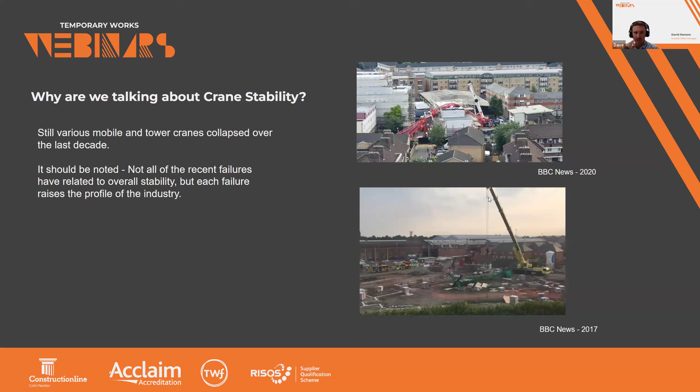Going over the basics, there's a few types of cranes that you should be considering, but the majority are, we're going to focus really on mobile cranes here. We've done various presentations on tower cranes before, but mobile cranes are probably more of the priority.

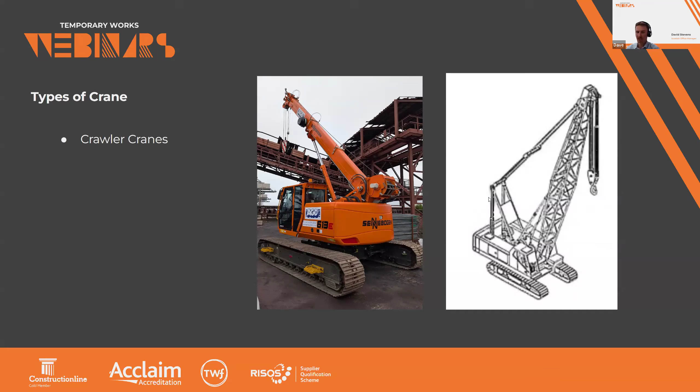Crawler cranes operate on tracks, so the pressure in general goes down through the tracks and onto the subgrade. Mobile cranes operate on outriggers, so when the crane is operating, the wheels are not on the ground, and the load is going down through the outriggers onto the subgrade.

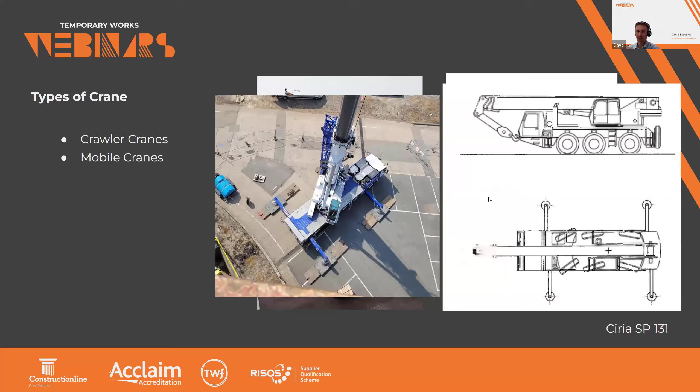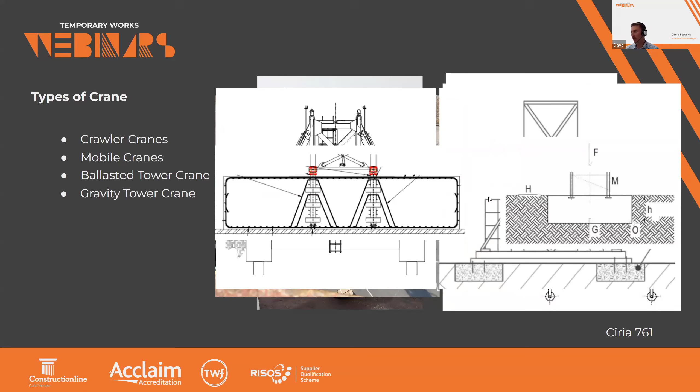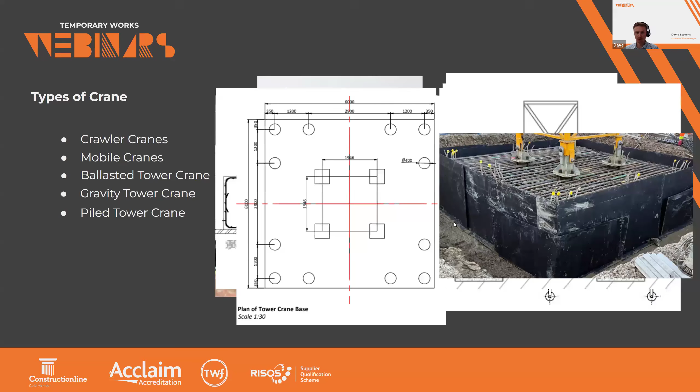There are also three kinds of tower cranes: ballasted tower cranes where there's just compression going through the foundations, gravity tower cranes where you've got casting anchors but the stability is maintained by the self weight of the foundation itself, and piled tower cranes where the moments generated by the crane are transferred via the piles, both in compression and tension, and that's what provides stability to the crane.

A brief overview of roles. The appointed person is responsible for the planning, coordinating and overseeing the lifting operations. They develop the lift plan and select the correct lifting equipment, among other things. The CIRIA Special Publication 131, which we'll reference through this presentation, gives you your roles and responsibilities. I've taken an excerpt of it there just to indicate what's required.

Where we come in as temporary works designers is we are provided with the loads from that crane when it's operating, and we carry out checks on the subgrade or the structures that are loaded by the crane. Where required, especially during demolition projects, we might work out the lift weights for structures. If it's not a specified lift weight, we'll carry out assessments on the lift weight and where the centre of gravity is.

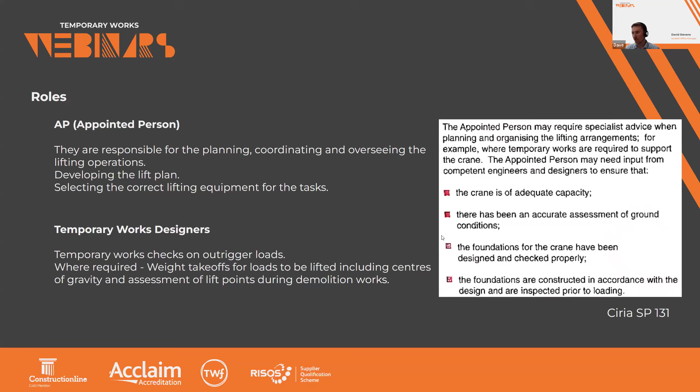And if the lift points are not rated lift points, then a structural assessment on that lift point is needed. So, main constraints: what causes cranes to have issues, or what are your worries when planning your crane position? I'm going to talk about these in more detail.

Things to consider are adjacent items that would require third-party authorization. The main one is Network Rail, who have specific requirements, which I'm going to go through. Adjacent structures and vegetation can cause clashes both with the boom, and one that's often forgotten is the stays that come off the back while lifting. I've never had to deal with it, but there are restrictions when putting cranes up near airports.

That's something to be aware of in certain situations. Overhead cables - I've got information on how they can interface with, or should not interface with, cranes. Services and buried underground structures matter too - this is what, when you've got your outrigger loads normally on road surfaces, the pressures or allowable pressures onto surfaces are.

There's the obvious risk of soft or poor ground, which most engineers are capable of assessing - that's the more fundamental thing you'd need to deal with. One that's often forgotten is access and egress. Cranes, when traveling around site especially, have very large wheel loads, and the swept paths are quite complicated, so understanding how you're going to get your crane into site and how it's going to leave is important.

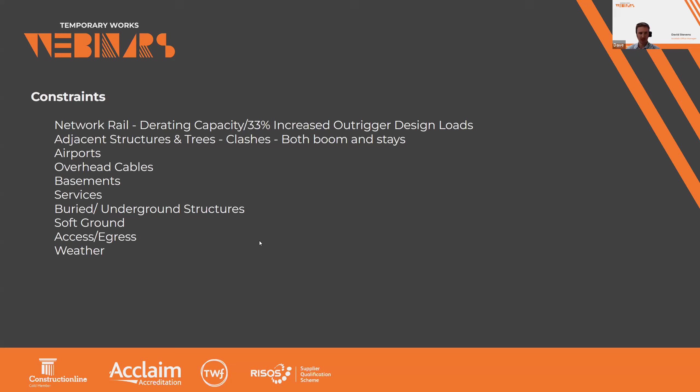And though not really controllable by the engineer, weather also plays a part. It's nice not to plan all of your crane operations for the winter, but it's not really in the temporary works engineer's control to deal with that.

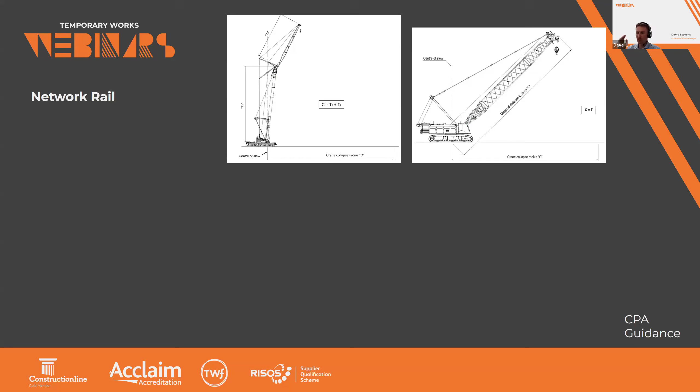So Network Rail is the first of those. I've taken some screenshots from the CPA guidance here that indicate what your collapse radius would be for certain cranes. In general, you're looking for the length of the boom above ground, and that equals your collapse radius. Once you've got that, you then need to consider the length of the load that you're lifting, because if it's a long beam and the crane collapsed, if that was orientated the wrong way, it would get closer to the Network Rail line.

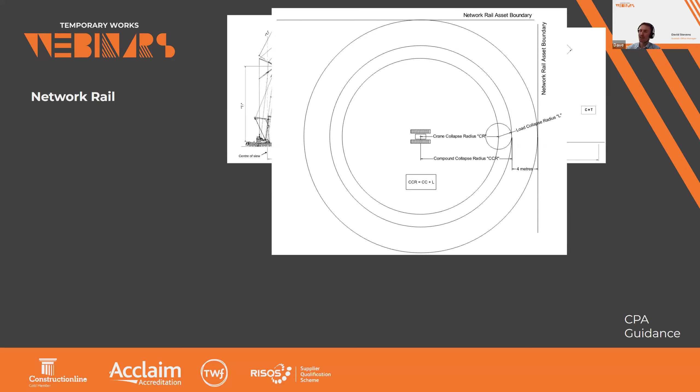And then they ensure that there is another 4-meter clearance zone beyond the end of your item that you're lifting collapsing. If you're outside of that, perfect, that's the best situation to be, that your collapse radius is not near network rail. If that would overlap the network rail boundary, then there are requirements.

So when it comes to mobile cranes, what you'll be doing is making sure that the crane is operating within 75% of its operating capacity. To go beyond that, in general, you'll need to get a closure of the line. Also, on top of that reduction, you would need to factor up your outrigger loads. There's some double factoring happening here. You derate your crane, and then you factor up your outrigger load by 33%.

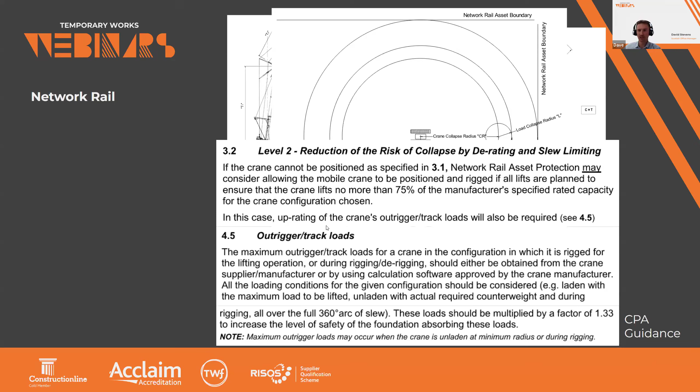So it'll provide quite a conservative foundation design for that crane, and the crane will be operating well within its capacity. Overhead cables. So the exclusion zone for overhead cables depends on the type of cables and kind of what you're operating.

Also, it should be noted that cables aren't static, especially on tall pylons. They sway in the wind, and they might sag more than they are in existing conditions if they are running at very high current when they heat up, or when they're loaded with ice, they can sag quite a lot more. I've got a screenshot there from the CPA guidance for lifting operations with excavators, which gives you some minimum clearance zones.

Obviously, the best thing is to be further away, so I would encourage trying to avoid operating adjacent to power lines, but where it cannot be avoided, that's some guidance on what to be looking out for. But the best situation is always not to be very close to them.

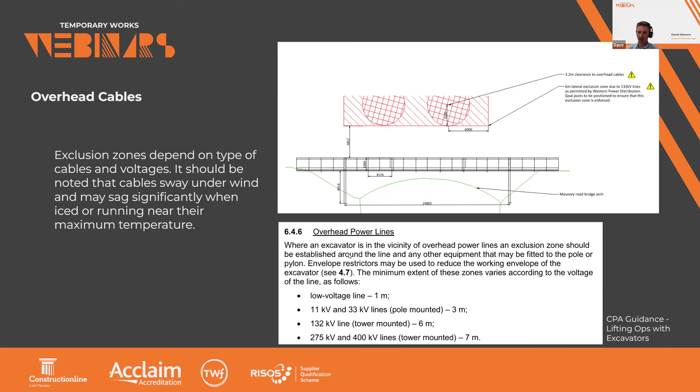So basement retaining walls. Again, I'm kind of referring a bit to the CIRIA guidance here. They give a danger area, in inverted commas, of when you would require further engineering considerations. They look to retaining walls or adjacent to basements of 4 times the breadth of the outrigger pad, or 1.5 times the height of the retaining wall.

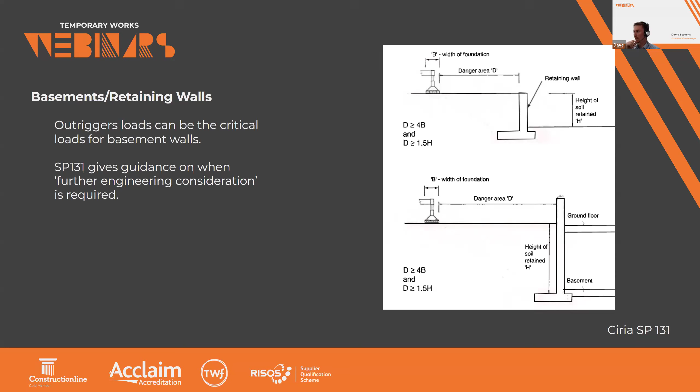So it gives some guidance on what is a safe place to put your crane where you don't need to provide further engineering consideration. To be fair, if you're right on that limit, I'd probably have a think about it anyway. But if you're within that limit, I would be consulting an engineer to understand what the implications are on the structure from positioning your crane there.

Slopes are pretty similar to basements. The distances are slightly different. So you're looking at 4 times the breadth of the outrigger, or 2 times the height of the slope away from the base of the slope, would be your safe distance that they consider.

But with slopes, more than with basements, if you're on really poor ground, it's worth getting an assessment, a formal assessment on the effect of that prior to putting your crane there, because if that does fail, it will be quite a sudden failure and it may not be recoverable for the crane. It's not just going to sink a little bit.

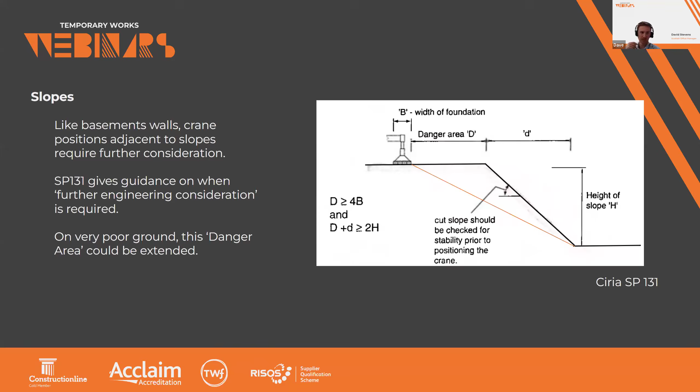Services. So services are often one of the biggest unknowns with crane positions. If you're operating in most British cities, there will be numerous services. They in general won't be mapped particularly well, and there will be significant unknowns on the depths of services or the construction quality. On new sites, there are design standards that should have been obeyed.

Things like BS 9295 would give you an idea of what the allowable pressures onto those services are. In most situations, what you're relying on is a live load comparison to historic loadings, which doesn't completely eliminate the risk. It just, if lorries are constantly going up and down that road, gives you an idea of what that service would be subject to at the moment, and we can compare that to the pressure from the crane. Saying that, very brittle services such as cast iron water pipes, even at very small strains, can crack.

And can break and can cause water leaks. So there is a residual risk when putting cranes above cast iron water mains that they may fail because of the nature of the cast iron pipes.

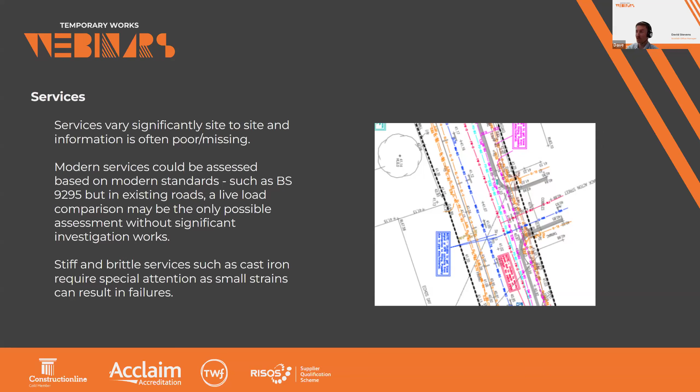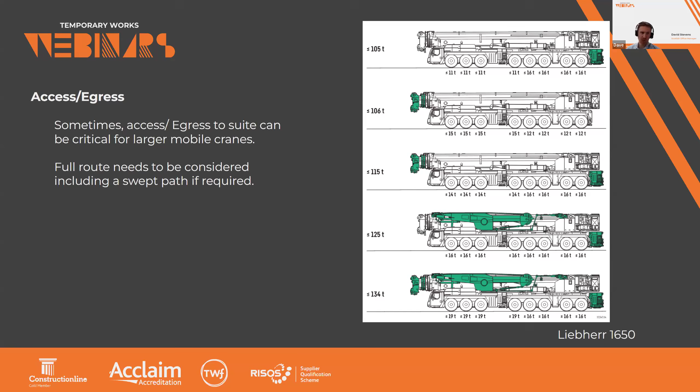So you need to really think about your swept path of where your crane is going and what that will interface with as it travels. So onto the geotechnical assessment.

The first thing to do is to understand what the loads are onto your subgrade, and this is normally going to be through a few layers. If you've got a mobile crane, it's not just in the direction of the lift that you've got your critical outrigger load. When it is lifting, you get the higher outrigger loads on the lifting side, but as soon as that weight has been dropped off, you've got the counterweight directly over the rear outriggers. They become the critical, highly loaded case. And quite often when a crane is setting up and slewing 360 with the counterweight over the outriggers, that can be the worst case, and it might not just be during lifting.

And it's always good practice, we'd like to recommend, if possible, that the crane does slew 360 with the jib in, just to bed in all the outriggers and ensure there is no movement when you're not lifting.

With crawler cranes, you get a triangular load distribution under the tracks. So unlike with a mobile crane, when you've dropped your load off or before you've picked it up and the counterweight's over the rear, you get a triangular load towards the rear of the track. So both cases need to be considered. These loads we will quite often equate to an equivalent rectangular pressure for calculations, and that's an accepted way to do it. It's very similar to pile rigs.

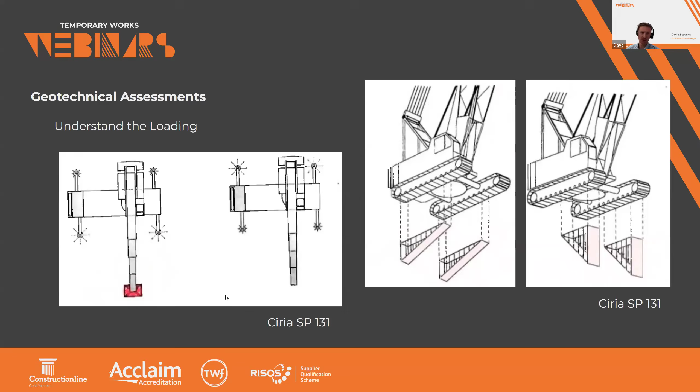So, types of outrigger mats. Assuming that your track or your outrigger is overstressing the ground without any outrigger mats, which is often the case, you would be looking at how to spread that load. And there's a number of different options.

The first and one of the stiffer options is if you've got big steel mats, and a lot of cranes will come with some form of steel mats. They should be allowed for. They provide pretty good load spread, and they're obviously very stiff, so that helps a lot there in comparison to the ground.

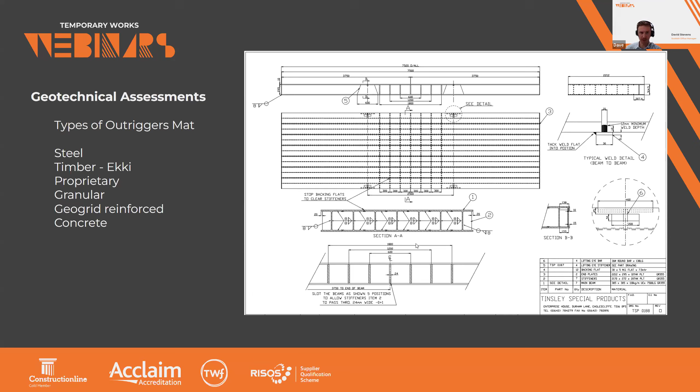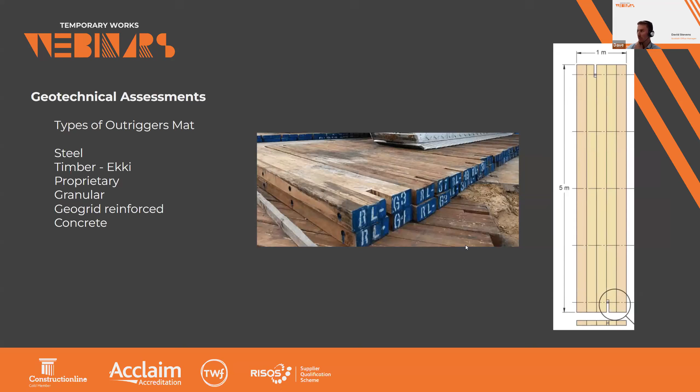Timber mats, so traditional timber Ekki mats, which will provide pretty good load spread, and that can be assessed with how that will distribute the load over the ground.

There's also plenty of different types of proprietary mats, both aluminium ones and different types of polymer mats as well. These are often more difficult to assess for a temporary works engineer because the data is not provided by the suppliers in some situations, or the data is incomplete. They may almost inadvertently give you a maximum load which the mats are incapable of spreading to that distance. So it's something to be aware of with proprietary mats, that even if they state that load, there's probably still a requirement to assess how flexible they are on soft ground.

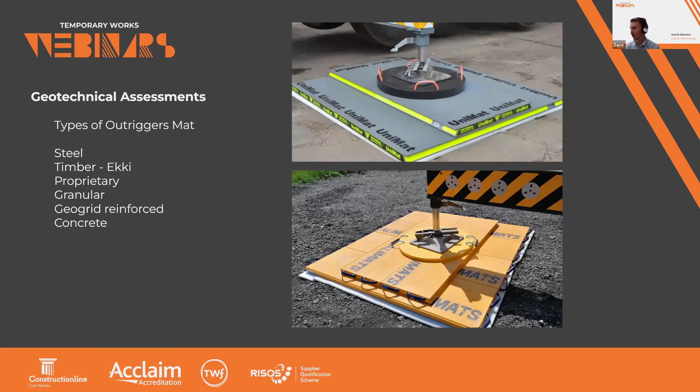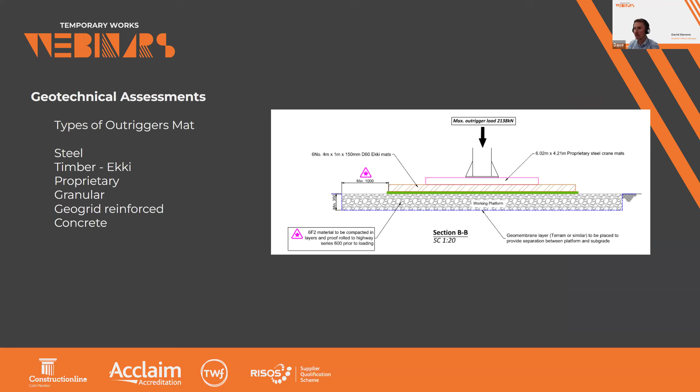When you're coming beneath those types of mats, then you've got your granular or your geogrid reinforced layer. What you're looking to put there is some well compacted fill, which will generally spread the load at about 30 degrees through to the subgrade beneath, and it also provides containment on granular and cohesive grounds.

Geogrid reinforced - the advantage of these is you can build up steeper batters if you are close to other site elements that require protection, and you'll get better load spread from a geogrid reinforced mat, maybe up to 45 or 50 degrees, depending on the type of geogrid and how tightly spaced they are. Also, if your crane is positioned on a concrete slab, that does provide load spread.

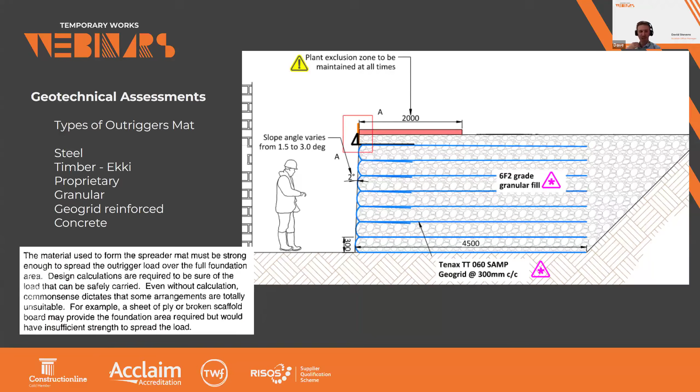I didn't bother to find a picture of a concrete slab because I understood that people would understand how that actually works. So this caught my eye going through the special publication, which I found quite amusing - it notes that a sheet of ply or a broken scaffold board doesn't provide a suitable foundation area. I think it's a good reminder that not everything is the same stiffness, and you really need to think about how stiff the mat is that you're putting down. I like the gist of the quote.

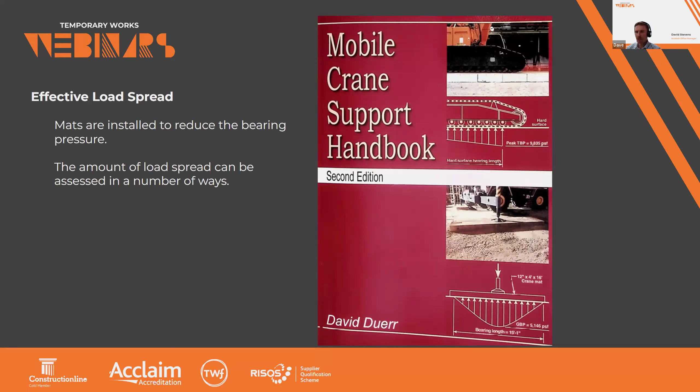So when it comes to assessing how far that load would spread, what we would generally use is the David Duerr method or something similar that looks at the stiffness of the crane mat in comparison to the stiffness of the ground, and how far that mat would effectively spread the load.

So if you've got a track in very soft ground, you would get pretty full load spread because the track of an excavator is comparatively stiff compared to the ground, as shown in the top surface. Whereas if an excavator was tracking on a concrete slab or something like that, then you would only get load spread over the short area underneath the crane. The same applies to outrigger pads, or outrigger mats.

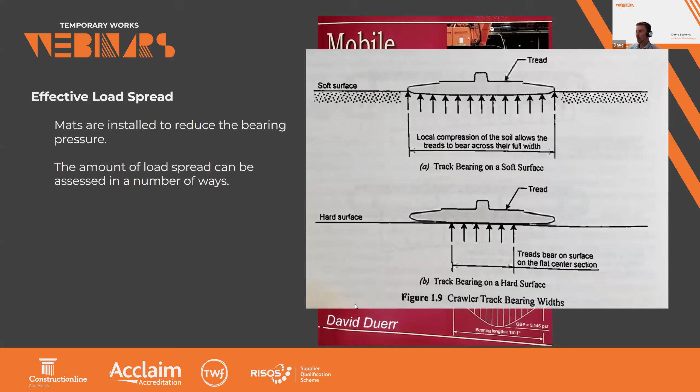So if you've got a very stiff ground, kind of a working platform or a concrete slab, you don't get significant load spread from the outrigger mats. You don't just get the full load spread. And you need to understand and calculate what that load spread would be over the length of the mats.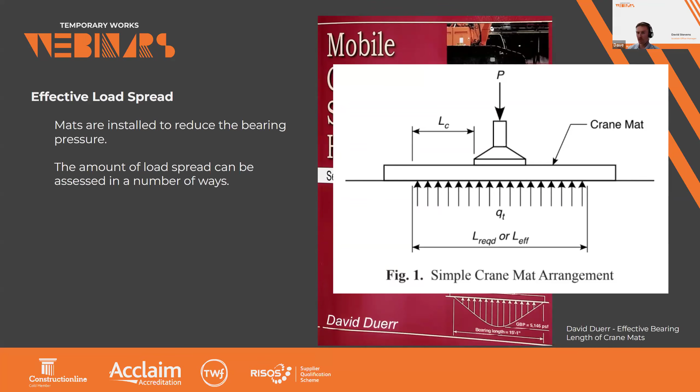David Duerr gives a nice way of calculating that. You look at your moment capacity of your mat, your shear capacity, and the allowable bearing pressure. With those estimates, and they are estimates, well the allowable ground bearing pressure is an estimate, you can then assess your effective length.

Geotechnical assessment - I didn't really want to go through how Eurocode 7 works or Terzaghi. So you need to undertake a geotechnical assessment to make sure the ground is going to be suitable for the loads you're putting onto it. To do that, it may not be the top layer of ground that you're worried about. That might be quite good. It might be a road surface, but beneath that might be a more critical stratum that would be loaded more by a crane than by road vehicles because of the bulbs of pressure.

The water table definitely needs to be considered because granular ground, when below the water table, will provide a much lower capacity. You need to understand the load spread through the layers of the ground and the outrigger mats, as I've touched on before. You do need to check the bearing capacity and then consider settlement.

Global settlement may not be a huge issue, but differential settlement could definitely be an issue. So if some of your mats are on a hard surface and some of them are on a softer surface, if it's half on a road, half on the site, then you really want to be thinking about what would be your differential settlement due to that crane. Is it going to tip at all? And just understand how that might affect things.

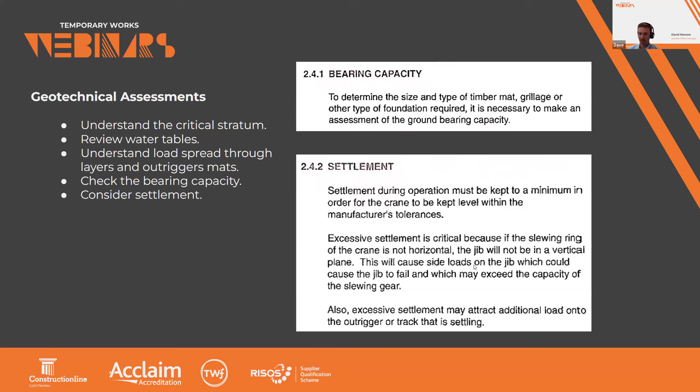So settlement should definitely be considered when looking at a crane. The bit from the CIRIA guide does note that it could put more loads onto the jib. So even if you've not got a full geotechnical failure, that settlement could cause failure of other elements of the crane. Tower cranes in general have a maximum slope to prevent second order effects from the big counterweights being off-centered down the mast. So it's definitely worth having a think about and understanding when you're trying to place your crane.

And the final bit on plate bearing tests. Quite often we'll get asked, can we just do a plate bearing test on the road or on a slab to justify that the ground is good to put your crane on it? David Duerr puts a very good statement together which clearly notes that it's not a very good idea.

The bulbs of pressure from a plate bearing test is not equivalent to a crane mat. A crane mat is much wider, and therefore you get a much deeper pressure bulb, and you'll load the ground beneath that harder top layer to a much higher pressure than a plate bearing test would. Even if your plate bearing test is going to 2-3 times the pressure, if it's only a 600 mil plate and you've got a 3 meter wide outrigger mat, it's just not comparable at all.

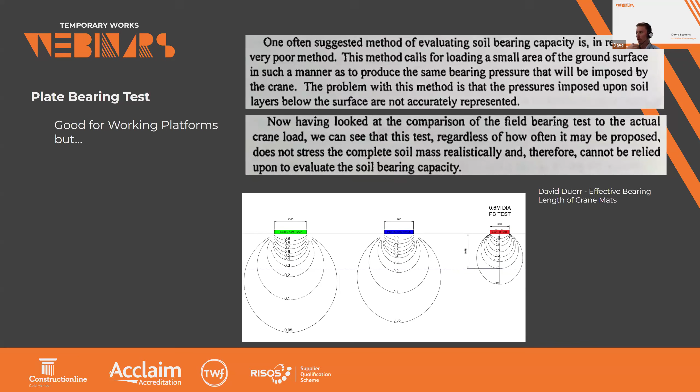So I'm going to hand over to Rami now to run through a quite recent crane position we did over Echo Street in Manchester.

Thank you, Dave. So yeah, as mentioned, I'll briefly talk about a recent case study, which is Echo Street. And as you can see from the image on the right, it's very close by to Manchester Piccadilly Station. So this project is essentially the construction of some student accommodation buildings, which will be 3 towers of 16, 22, and 28 stories.

Now, the principal contractor was Bowmer and Kirkland, and we've had quite an extensive involvement within this project on the temporary works side of things, and this spans the entire project lifecycle. So from the very early works, such as the piling mat, right the way through to nearing practical completion now.

And for today's case study, I will cover the dismantling of Tower Crane 1, which was positioned between the two larger blocks of the buildings. There were two tower cranes actually on site, both of which we designed the reinforced concrete foundations for, and TC1 was used to dismantle TC2 as it was taller, and now a 650-ton Liebherr mobile crane was used to dismantle TC1.

And directly adjacent to the site on the south elevation, there's also an active network rail asset, which needed considering during this job. And this was done by derating the crane's capacity and factoring up the outrigger loads, as Dave mentioned previously.

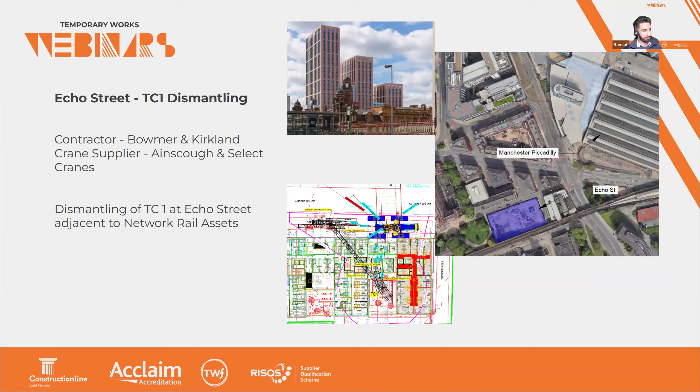The key considerations within the design stage was the proximity of the lifts to the network rail asset, which is why the risk classification for this job was Cat 3, and therefore Form C was also submitted as part of our design package for Network Rail's approval.

The checks that were carried out involved an assessment on the underground buried services. As you can see in the bottom right image, there was an extensive amount of services within the road and the pavement. We had to ensure the imposed pressures at this depth were within the safe working load of these services.

This was carried out as per a live load comparison, which Dave touched on before, where we compared the imposed pressures from an HGV wheel, which has proven to be okay as we've got proof that they've run on that road before, against our imposed pressures from the crane mats.

The crane was also to be positioned directly next to two basements, which consisted of retaining walls, and these also required being assessed. A routine ground bearing assessment was carried out to ensure the underlying ground beneath the road and pavement level had sufficient capacity to withstand the large forces we were going to impose on it.

And finally, an assessment on the spreader mats was also carried out to determine the ability of the mats to withstand the point load from the outriggers and then to achieve the load spread area required for this assessment.

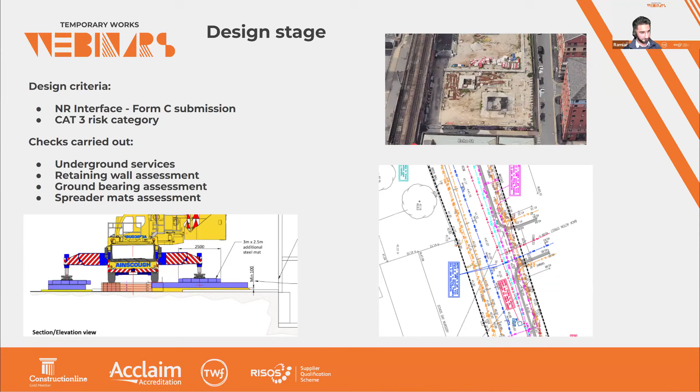Once the design approach was established, we visited site and proposed some site investigation works to be carried out. Since the basements were mostly furnished, as seen in the bottom left image, we were unable to design a propping solution to support these retaining walls.

So we had to carry out an intrusive investigation on the wall to determine the composition and thicknesses, which allowed us to assess the masonry wall in its existing condition. Trial pits were also carried out directly adjacent to the retaining wall on the public side.

As we suspected, there was not. Before we did the site investigation works, we thought there may be some concrete retaining wall on the outer face of the masonry wall. However, this was not the case.

The trial pits allowed us to confirm that the ground profile we had interpreted from the nearby borehole logs and the ground were pretty consistent as well. So the proposal of this site investigation allowed us to eliminate many of the potential unknowns within the design stage and therefore produce an efficient and quite accurate solution.

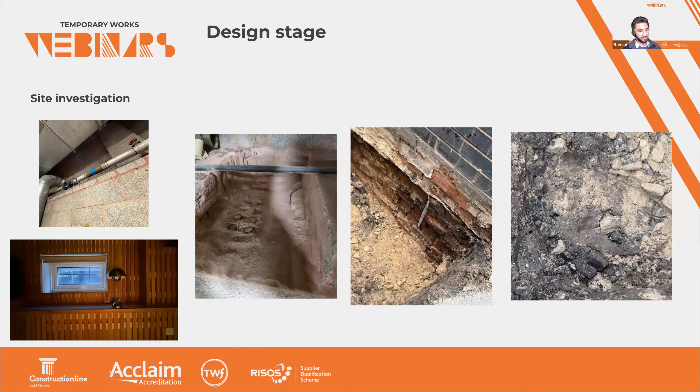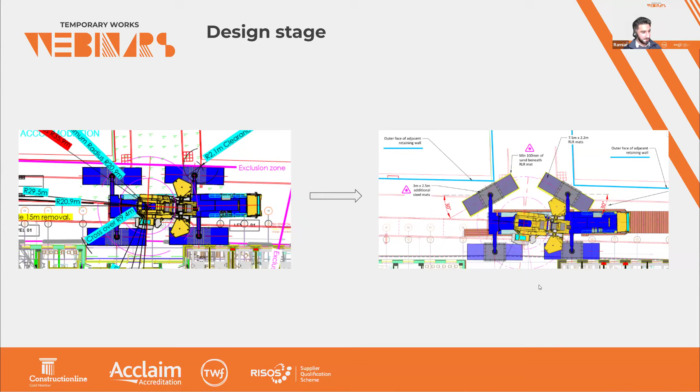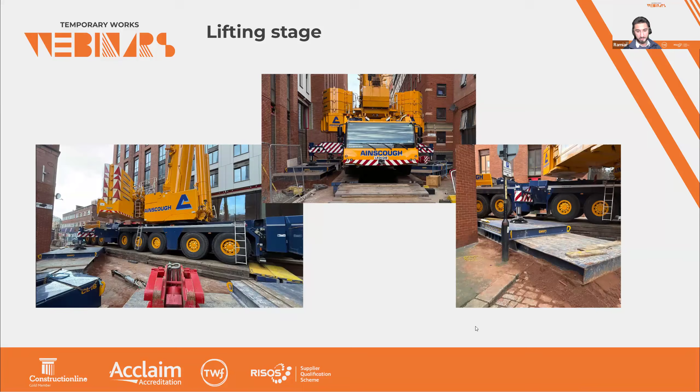This was the crane all set up as per our provided drawings, and it took a while to rig up as it had quite a lot of counterweights and a 23-meter fly jib. It was assembled with the help of an ancillary crane, positioned to the west of the crane, also along Granby Row. However, this was positioned far enough from any retaining walls.

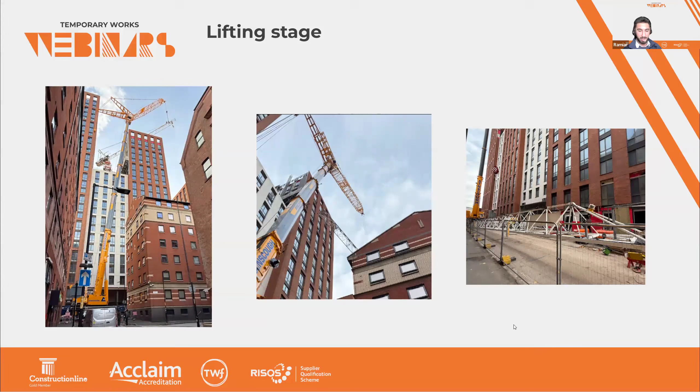These pictures show the jib of the tower crane being dismantled, lowered down, and then transported off site. The entire jib was brought down in one section, as you can see, and then put onto the back of a low loader and transferred away.

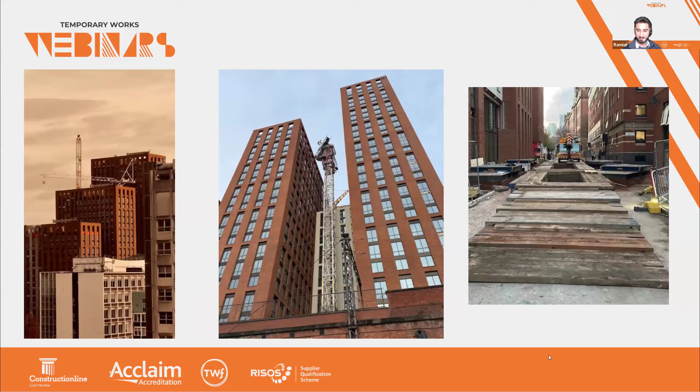Once the jib and counterweights had been removed from the tower crane, the cab and the mast sections were the remaining lifts, and they were also taken down sequentially. The entire job from the crane arrival to when it was transported away took around 3.5 days and was very successful — quite a short turnaround, but went very well.